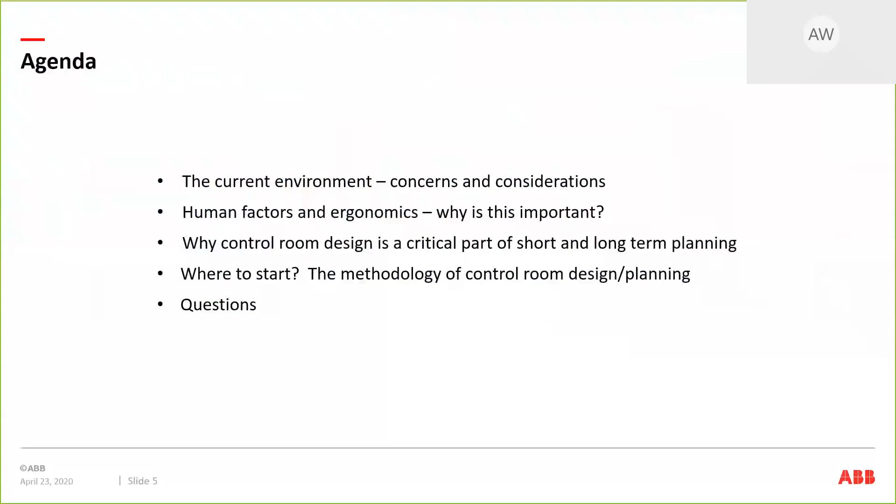So to begin, in the current environment, the key points nowadays: all of industry is deemed essential. Operations must continue, but potentially with reduced staff. There's an increased need for effective technology to work both on-site and remotely, and the need for operations staff to work even more efficiently, processing info quickly and reliably. Employee health, obviously, and the ability to concentrate are also very important right now. Situational awareness is becoming more critical.

Interestingly enough, there was a study that just came out, published on April 6th, having specifically to do with COVID-19, and some interesting points came out of this. This study was done by the University of Houston, based on data they had collected between March 31st and April 1st. The key points that came out of it: 55% of respondents believe companies must invest even more in employee health and well-being. 27% said they had trouble remembering instructions. 21% said they had trouble paying attention, which suggests potentially some safety risks. And the respondents saw the current situation as an opportunity to innovate, learn, and use technology to create an even more efficient system that serves industry and the public.

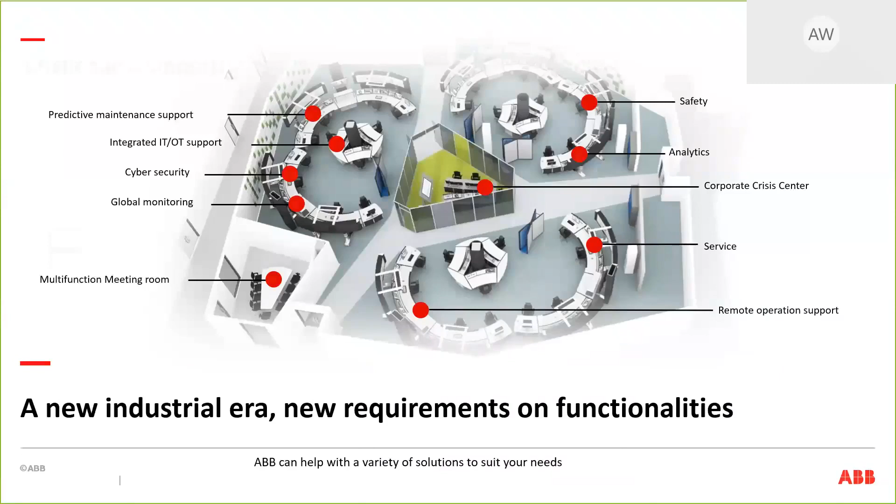And again, there's a lot of challenges out there, but challenges are opportunity. This is how we look at it. As I mentioned a few minutes ago, even in this situation, it really is giving you the ability to take a step back and look at your current operations and how you could be more effective and more efficient.

So there's a variety of things at ABB that we can do. We can get into that, but just some examples: we can improve graphics using HMI, connect to a collaborative operational platform, get remote support from ABB experts. You could also consider MOM, which is Manufacturing Operations Management. That gives you process and production intelligence, manufacturing execution systems, and production optimization.

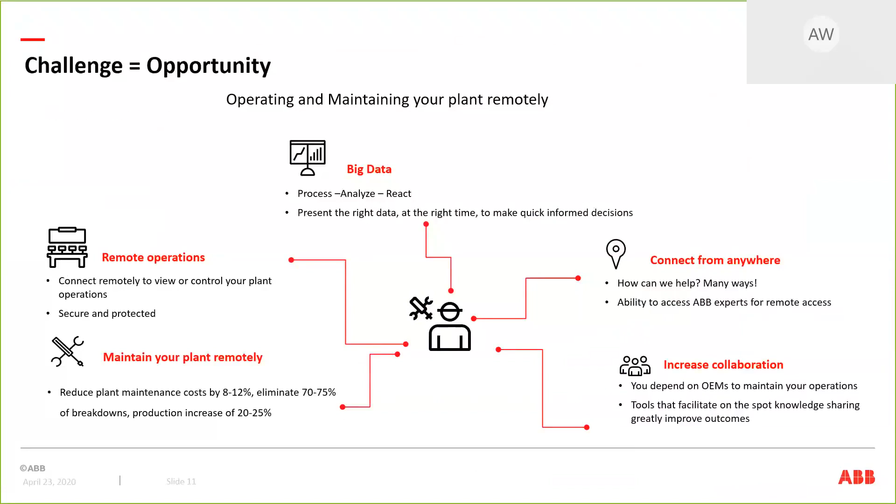Generally speaking, we just want to make sure we're able to take all the information you need access to and enable you to access it remotely, as well as in normal operational situations. So what we want to do is improve the first-time rates, shorten resolution times, and access remote out-of-reach locations. Basically, the key point here is taking as much information as we can and making it available to you, helping you get access to the information you need, and increasing the collaboration.

So, human factors and ergonomics. Why is this important? This is often overlooked in overall planning, but it's a critical component. There are three key areas that are impacted by human factors and ergonomics.

One is the cognitive ability—an individual's ability to process information quickly without missing critical information. The second is physical—the ability to react quickly, to see the information, and an environment that increases alertness and reduces stress. Going back to that situational awareness I mentioned earlier, it's actually a really important point. The physical really does have an impact on how well the operator is able to react.

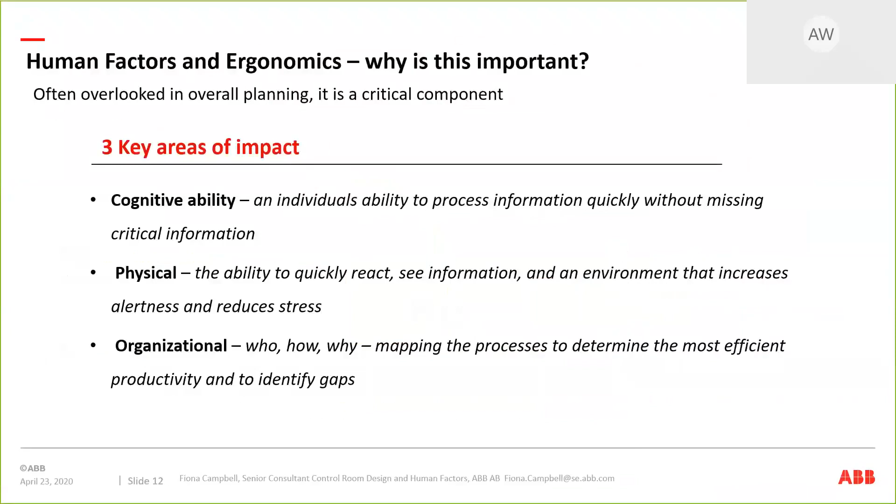And then, of course, the organizational—the who, the how, and the why. Mapping the processes to determine the most efficient productivity and to identify gaps in the workflow, in just day-to-day operations. That's a critical point. So the combination of these three can be done through proper planning and proper control room planning and design.

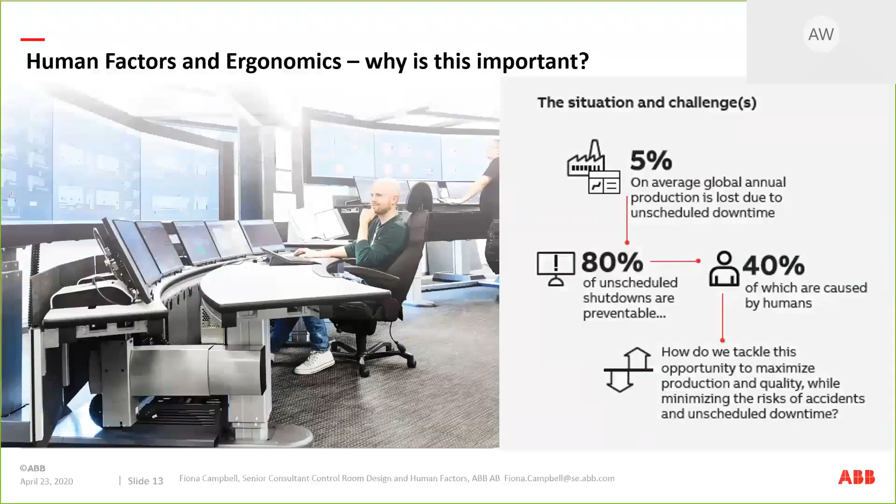Going back to human factors ergonomics, why is it important? These numbers are a little outdated, but on average 5% of global annual production is lost due to unscheduled downtime. 80% of unscheduled shutdowns are preventable, 40% of which are caused by humans. That 40% number isn't exactly up to date though - the most recent research I've seen says it can be up to 80%. If we think about it, most errors and downtime can be directly related back to the human.

So this is where we are a little different. What we do is look at the control room as the absolute center of operational effectiveness. The need for your operators to work efficiently is a priority. The ability to fine-tune your operations means you want to make sure they've got more responsibilities, but it allows for increased productivity, less downtime, fewer shutdowns, and quicker resolution of potential problems.

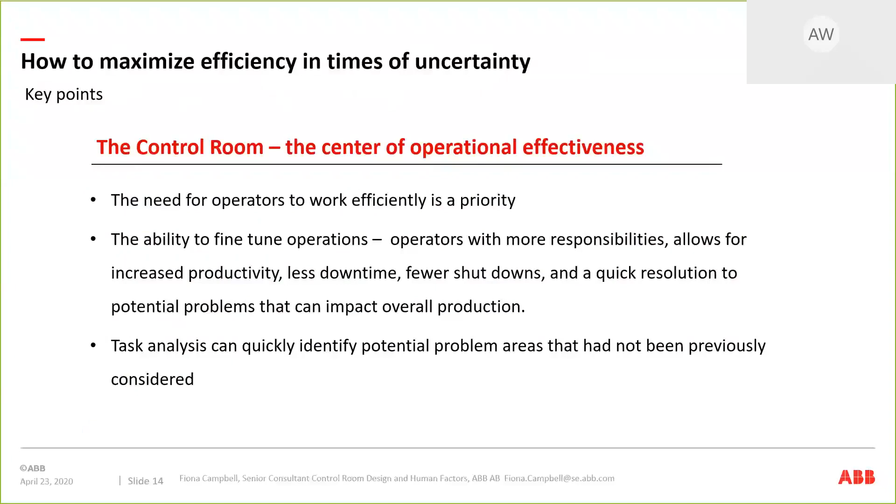Task analysis, again a workflow process, is a key element as part of the entire process. So when we look at control room design, we look at it specifically from the human perspective. The human is the one we focus on when looking at effectiveness - it really has to come down to that.

So the impacts on effectiveness - information overload. There's more information than ever before that needs to be processed. If you look at the definition of Industry 4.0, the fourth industrial revolution, this is a new era that builds and extends the impact of digitalization. Very key, important point. Digitalization is obviously a big tagline these days, along with the technology that goes along with it.

Predictive maintenance - here's a couple of examples. Predictive maintenance systems can reduce plant maintenance costs by 8 to 12%, and more importantly, eliminate 70 to 75% of breakdowns and lead to production increases of 20 to 25%. That's something really important as part of making sure things run efficiently.

Alarm management - this one's actually very interesting. What is your alarm management system like in your control room right now? It really should be a priority. I bring this up because it comes up often. We've got a client right now, for example, that said they had so many alarms going off in their control room that the operators finally decided to turn them off. They had something like 300 alarms a minute going off, and the operator said, I can't focus on this, so we're just going to turn the entire alarm management system off - which obviously begs the question, how do they know if there's a real problem?

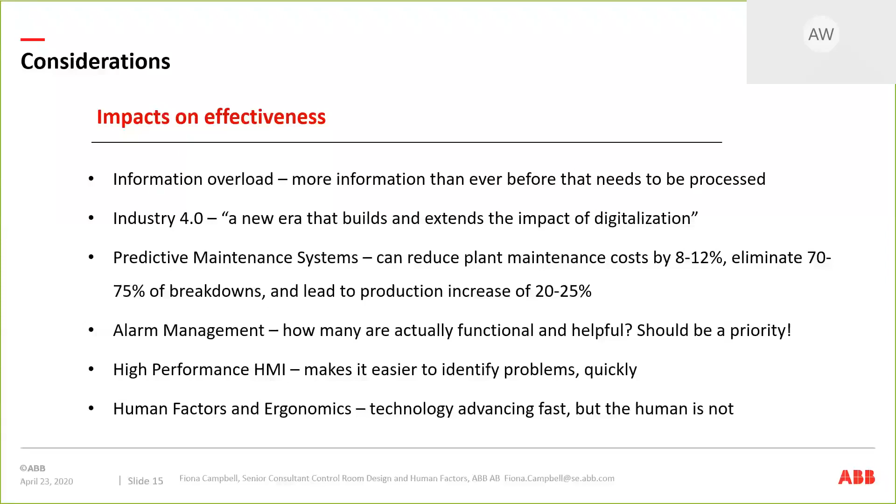Human factors and ergonomics is absolutely critical, and I'll repeat this throughout the presentation. The technology keeps advancing, but the human doesn't. So with the human not advancing as quickly as the technology, you've got to take a look at the best possible way to enable the operators in that control room to respond.

The role of the human is being underestimated. No matter how advanced and effective technology is, there's always a human that must react. So what is the best possible way to do this effectively, now and in the future?

Control room design and planning - how can this help? ABB has a control room solutions group, which Hampus and I are part of, along with our team based out of Sweden. What we do specifically is look at operator effectiveness, and we specifically look at control room design and its impacts.

So the question is where to start. We have what we call control room design studies, which involve control room planning and operations. We do workshops for a number of reasons, one being to identify key focus areas, based on both operator and operational effectiveness.

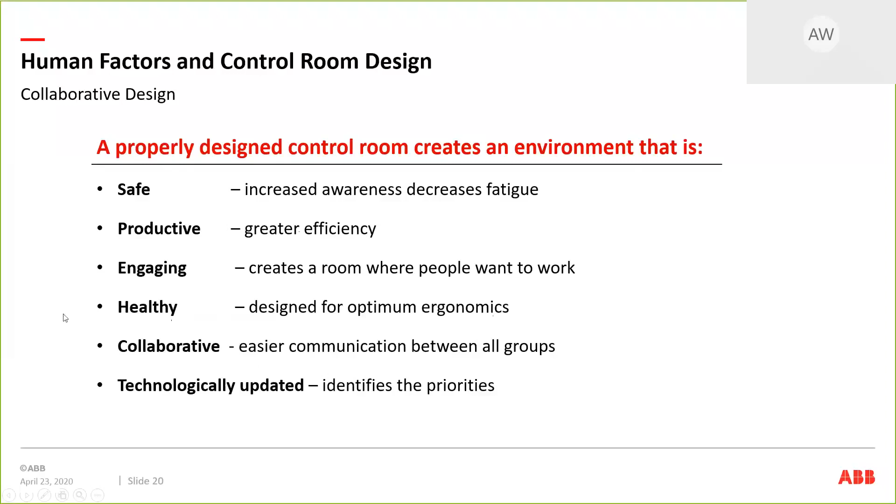We also want to focus on the collaborative side, making sure operators are able to communicate with who they need to, while minimizing the number of people coming in and out of the control room environment.

The other option is we also look at the ability to create remote operation centers, which some of our clients do think about as well. This also goes through a collaborative design process.

What we do is talk to existing operators, engage them, and allow for the more experienced operators to transfer information. We also look at digitalization as part of this.

Specific skills are required, therefore a specific environment is required. For task analysis, start by identifying one bottleneck, then analyze the processes used in this bottleneck and use it to implement changes.

So these are all things that we take into consideration when we're looking at control room design. If we look at control room design guidelines in general, there are a lot of them out there, but some are more important than others. The key point here is when you look at the control room, you can't just look at it as a room that's holding technology and furniture. There's way more to it than that.

So from the ABB standpoint, what we do is we look at it from a more holistic side, and we look at it specifically based on the human. This may become a little repetitive, but it's a really important point for us, and we think it makes a huge difference when you're looking at your entire operational effectiveness.

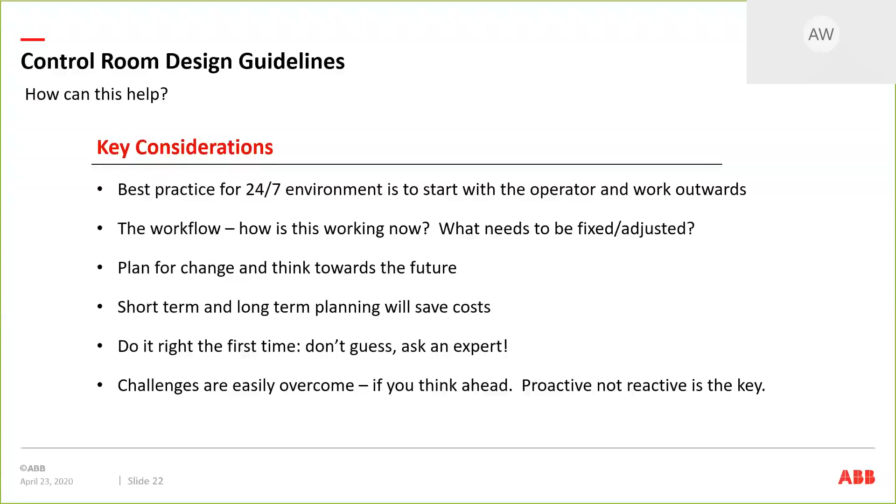So generally speaking, overall, the way this works - this is just a rough idea. We start with existing drawings and/or photos if it's an existing control room. From there, we put together a questionnaire. We take the information you've got, have conversations with you first, and then come up with a questionnaire specifically focused on things we see that might be a problem and that we think we might be able to help you solve.

From that, we then set up a workshop, meaning we put together a project team with you as well as your operators and start to get into a situation where it's an open conversation with feedback. We ask the questions, we get the feedback, and we've got the ability to come up with a lot of data. From that, we analyze that data.

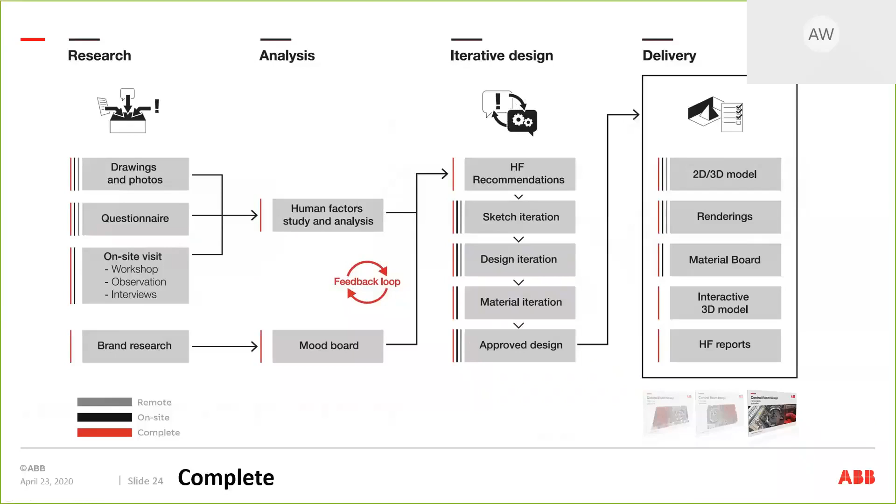We look at the human factors, we study and analyze everything we've collected from you. We then go back and forth in multiple feedback loops, and from there, we'll come up with a design and go through a couple of conceptual designs with you in terms of how the room should be laid out based on what we've learned in the process.

This allows for gathering information that's not always obvious to you, to management, or to the operators. But when you have the opportunity to sit down and have this kind of workshop, it gives you the ability to share the information. With these design studies, things often get identified that you might not have thought about initially.

We've had clients where after going through the workshop portion of the design study, they had to take a step back and put things on hold. For example, one client doing a greenfield design study expected to break ground and get things operational. But the information from the workshop revealed they had to put construction on hold for 6 months because they realized they didn't have the proper workflow in place. They were simply planning to put operators in a room with a desk and a window, thinking that was all good.

It's actually very interesting because we can find out a lot in these workshops, and it gives a lot of really good feedback that you can use now, but it also gives the opportunity to save it and use it in the future as well.

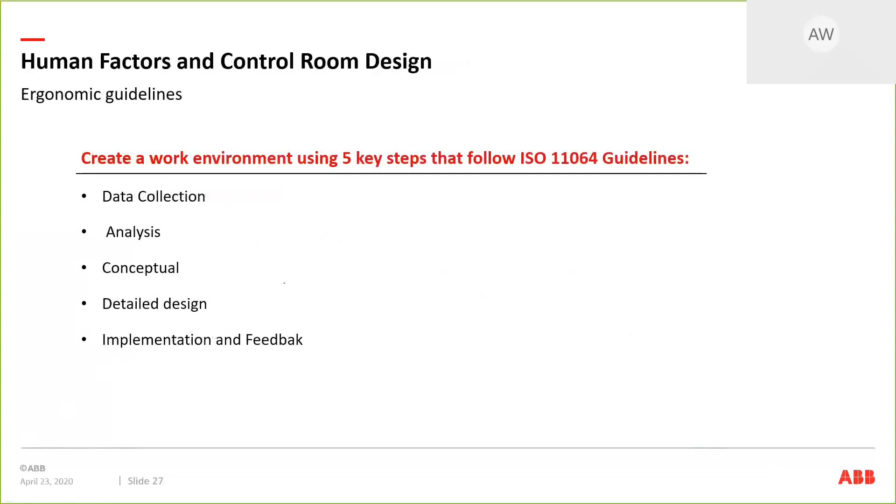The cool thing is that after we've done these studies and implemented a control room design, we go back and get feedback, and make the tweaks needed to ensure you have exactly what you need to be really effective. Something to think about too: if a control room is done right, it can save you money in the long run.

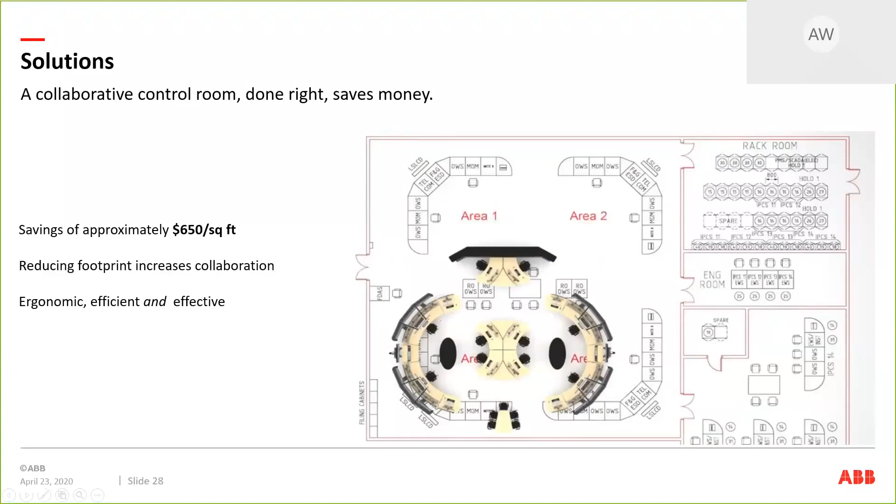Environment is really, really important when it comes to being effective. You've got to look not just at where the furniture is located, but at the interaction between the different areas. And this isn't just about the control room itself -- that's another point I wanted to mention.

What we do is look at areas adjacent to the control room area -- offices, engineering, management offices, anything else that's not necessarily physically in the control room but should be adjacent to or close to it. So we'll look at meeting rooms, kitchen areas, break areas, where they are, and how much traffic is coming in and out of the control room.

Just to give an example of some of the things we look at when we're doing this—it really is comprehensive, not specifically on the furniture. Another key point is that traditional thinking in FEED studies many times leads to outdated commodity thinking. So the earlier we get involved, the better, because that gives us a chance to really ask the questions and get a clear idea of things you might not have considered.

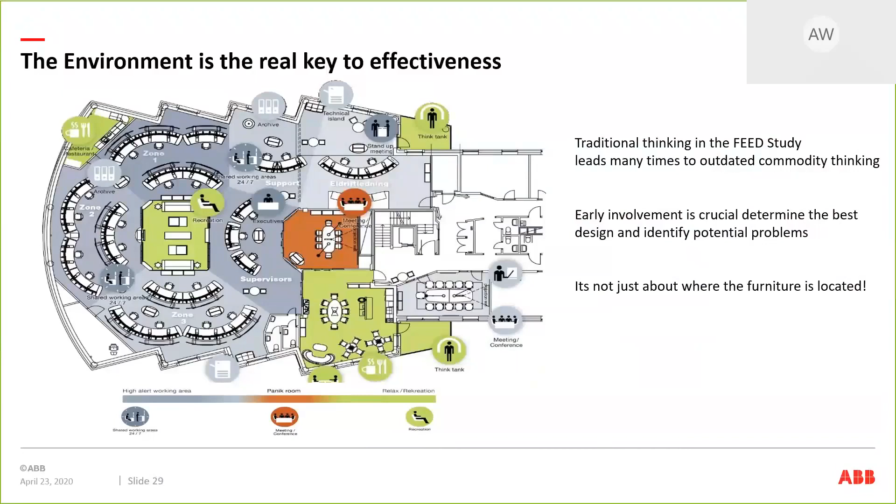We want to make sure that when you're making changes to your control room, you've got the ability to look at it today, but it's also going to give you something for the future. We feel strongly that we don't want you to spend money where you don't need to, so we make sure it's set up now but also has the capability of expanding. I'll give you a couple of examples.

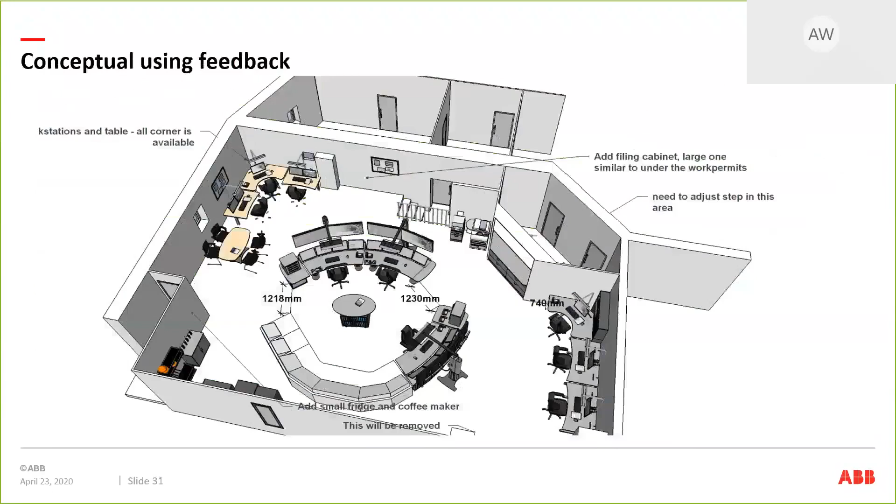This is an example of a conceptual drawing we did early on in the process. This is another one where we're in the middle of doing a conceptual design and design study for a client. This is where we get into the feedback part, asking questions and getting the client's feedback on things that need to be changed. This came up to be the end result for that one.

If we look at this one again, this is where we started with the architecture drawing. This was actually two or three concepts into it where we'd already changed some walls and moved things around. We looked at a variety of things—in this case, they had their server cabinets here, but the door wasn't big enough to get them in and out. Again, they had the break room here, but the door locks here to get into the control room.

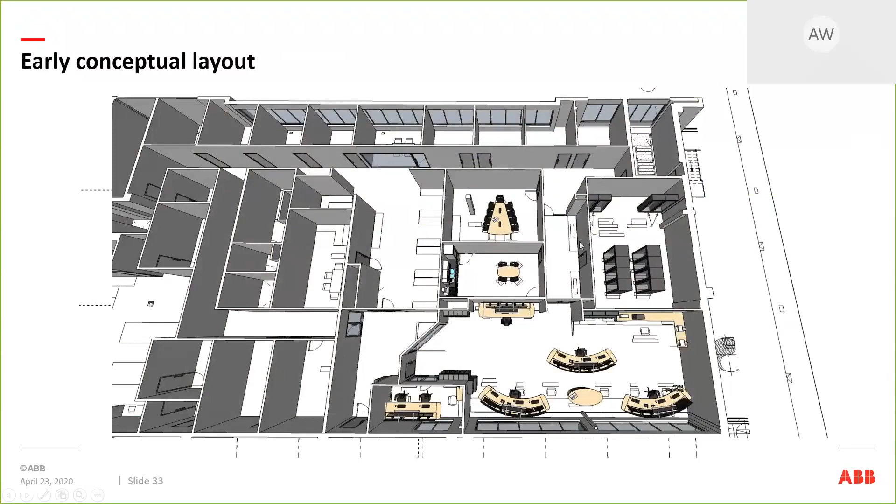This client wanted visitors to be able to come in, and initially they wanted them to walk through the control room. So we discussed that with them—you don't want people just walking in a traffic flow through it.

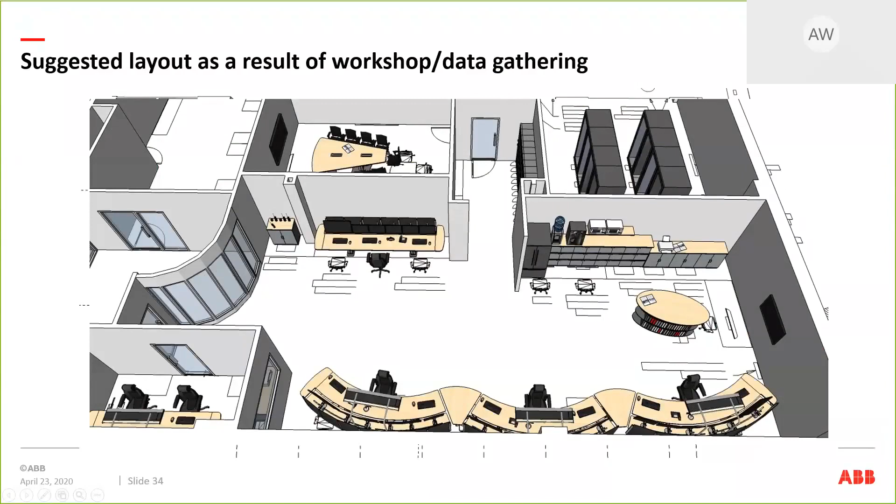As this one went along, we came up with a layout based on the data gathering we discussed in the workshop, and came up with a separate door. The door for the server racks is now at the other end, large enough for IT to get in and out if needed. We added personal lockers for the operators, and gave them their own break area so everybody on the floor wasn't accessing their specific break area.

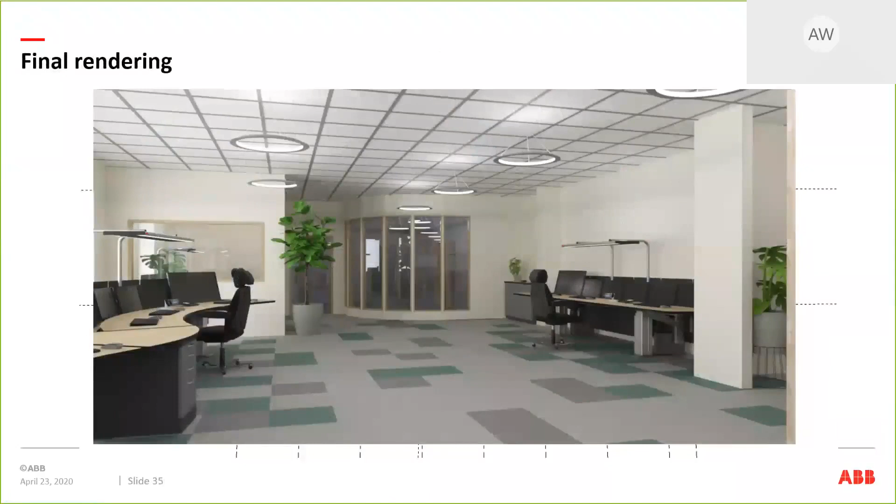The end result is that we also give visual renderings. These allow you to see the space and how you think it's going to look. It sums up everything we've talked about, giving us the opportunity to look at the workflow and the environment, and the technology requirements.

We have the ability to do this very early on in the process, and we also have the ability to do it if you're just looking to make changes right now—we can do that as well. The key point is that we are extremely objective, and we want to make sure we can be as helpful as possible.

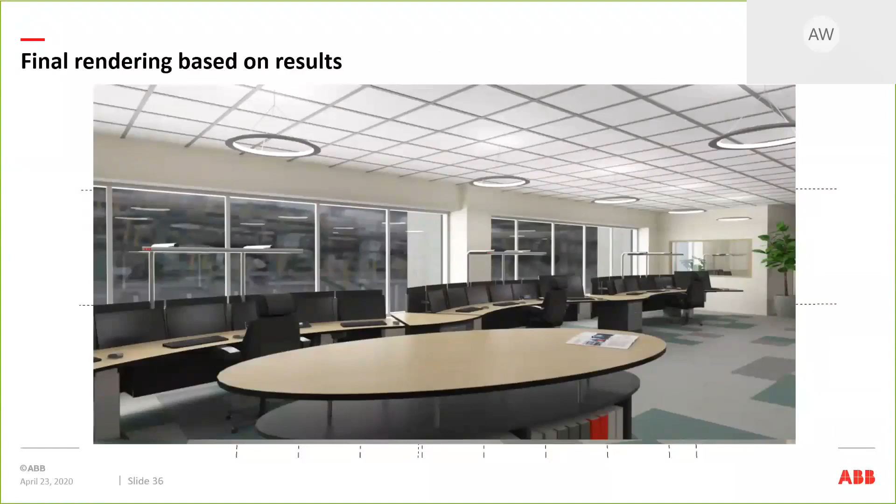So ABB's Control Room Solutions Group—that's what our focus is. We look at more than just the furniture. We look at the actual environment, the workflow, the operator, and our key focus is always going to be the human factor, because no matter how advanced the technology is, it's always the human that has to react to it. This has been our key focus when we do our design studies.

And now I believe we are at the Q&A, so if anybody has any questions.